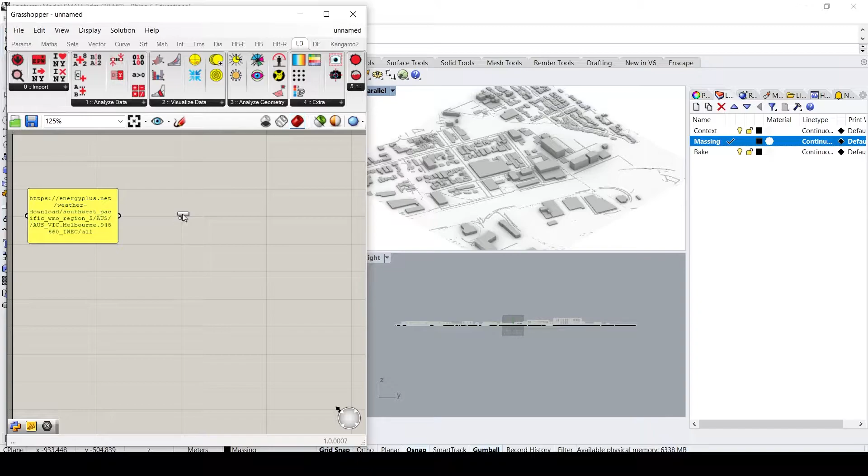So then we'll go up to the LB Download Weather and we'll click that and bring it onto the canvas. We link the weather URL to there, and then we're going to go to the LB Import Location.

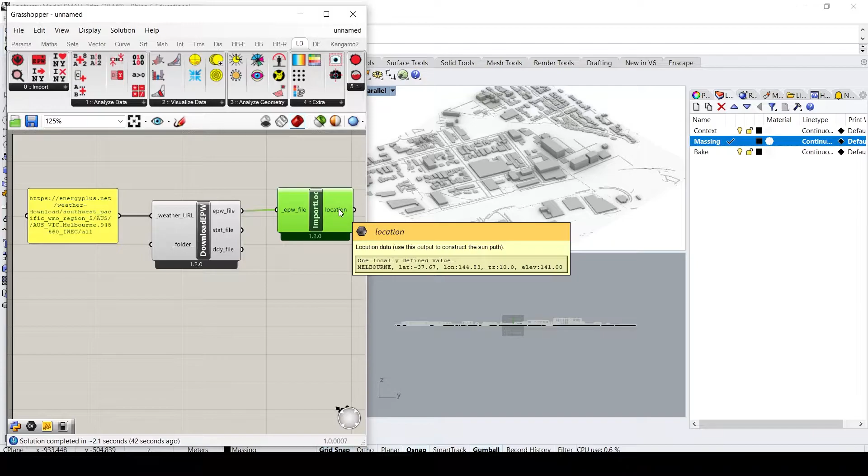We'll drag that onto the canvas and link the EPW file to that. Now if we hover over location, we'll be able to see that it's Melbourne, and it'll give us the latitude and longitude values.

From there, we're going to go to LB Sun Path, click that, and drop it onto the canvas here. We'll bring it over and link the location to that.

But we're going to need a few more things for this. We're going to have to give it a date and time. Basically we've got to create a time period for this sun path to run the analysis for the duration of this radiation analysis.

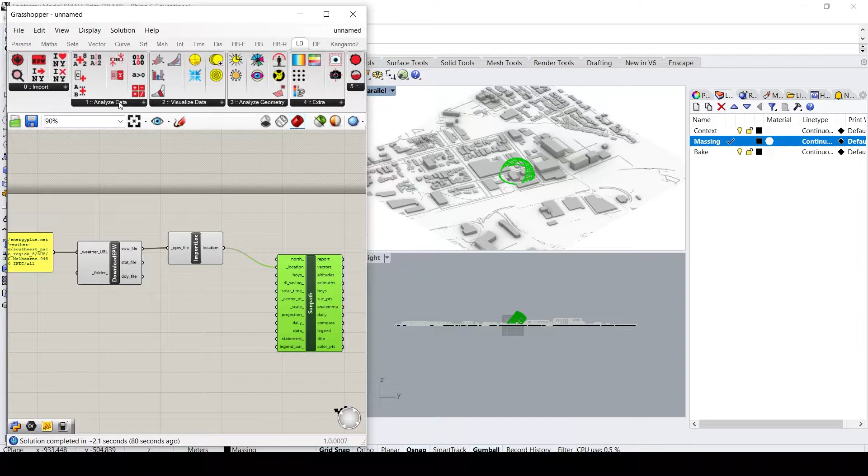So we'll go to the Analyze Data tab and go to LB Analysis Period. We'll click that and drop it on the canvas. This will give us a period of time, so we're able to give it a start month and day as well as an end month and day.

So I'm going to start it on the 12th month, and I'll do that by entering a panel, and I'll put 12 in there.

Then we're going to add a day for the start day and an end month and end day. So we'll do the 1st of the 12th. We'll do the first month and we'll end it on the 1st of the first month. So now we just put 12th month, the 1st of the 12th, end month, the 1st of the 1st.

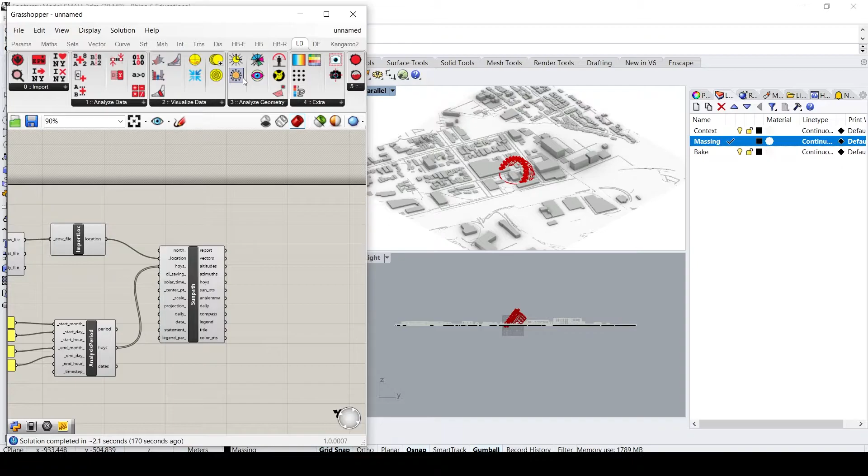Now that that's all done, we can add the HOYs value to the HOYs value on the sun path. We have to drop another Ladybug tool onto the canvas, and we're going with LB Direct Sunlight Hours.

We'll click that and drop it on, and what we're going to need to do is connect the vectors to the vectors. We still need a few things on this direct sun hours tool in order for it to run the analysis.

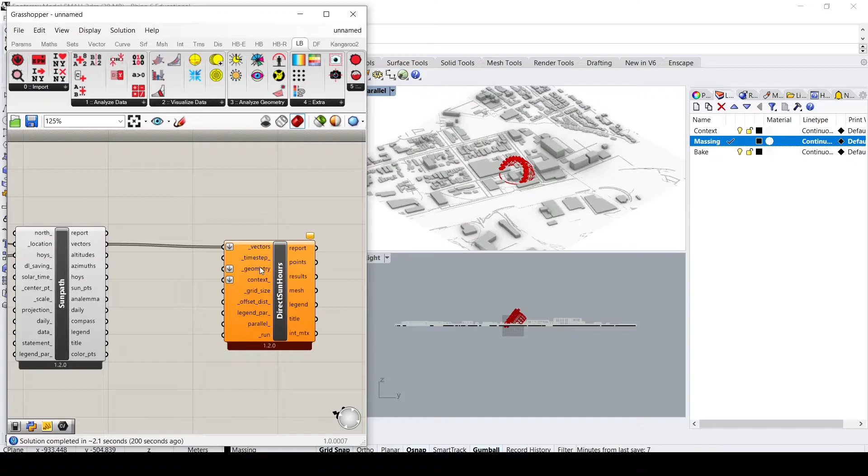We've got to add, if we go up to the box here, geometry, grid size, and give it a toggle to run the test. So we'll go to add a toggle and we'll put that down on the canvas, a boolean toggle. We'll put that on the run, then we'll add geometry.

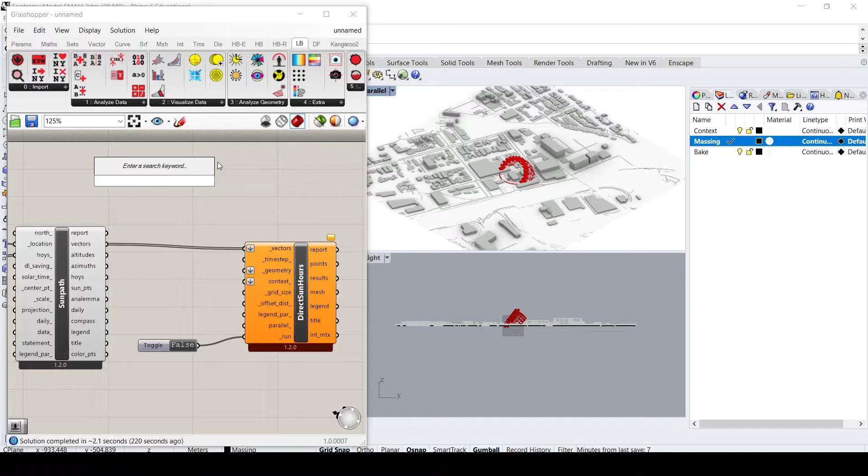I find the best way to add geometry is to put it through a geometry pipeline so that it references it straight from the Rhino model. So we'll put that there, we'll add geometry.

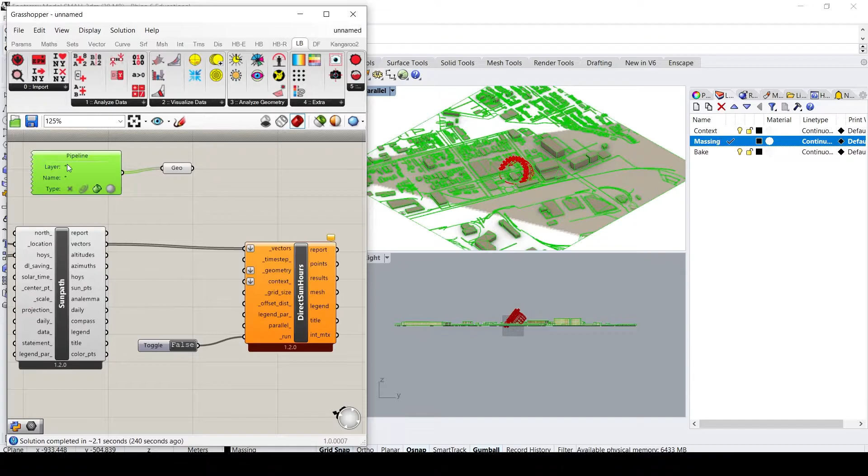Now we'll add that in. We've got to make sure that it's on the geometry pipeline. We double click this tube-like image here, and we're going to add a layer, calling it massing, as that's what we already have on the Rhino model. We'll connect that to geometry.

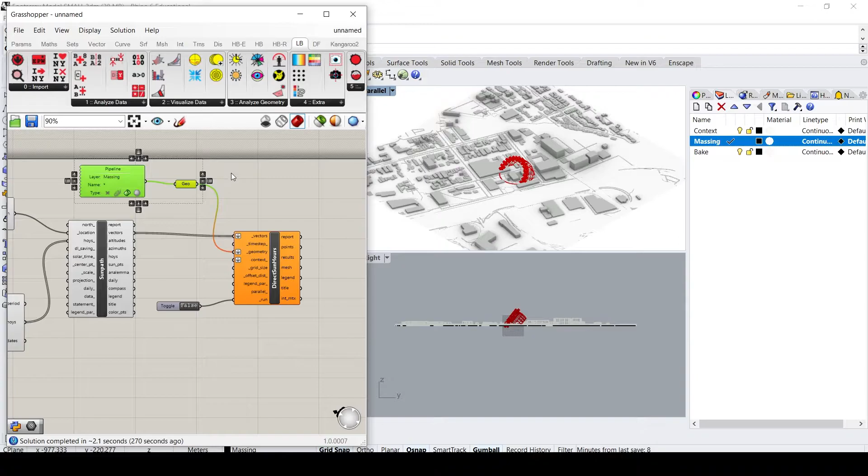Then we'll copy and paste this, and reference the context of the analysis. So Control C, Control V that, and we'll change the layer to context.

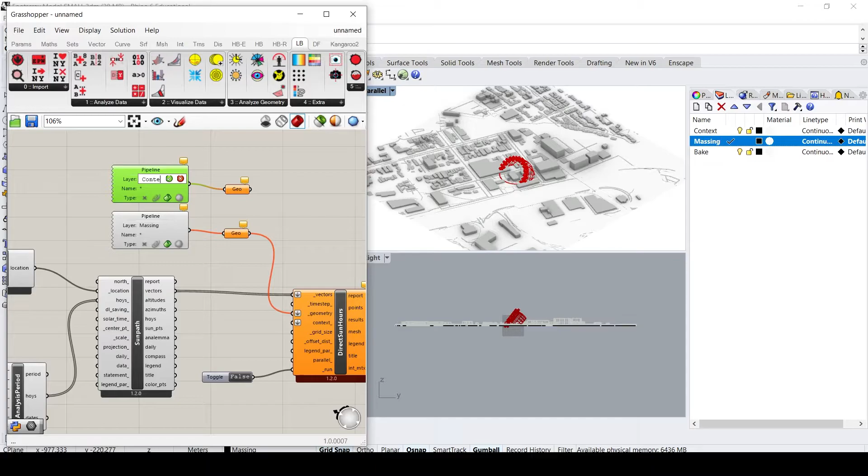The context we're using for this test will be the Footscray cityscape that we brought across in the last tutorial, working from 3ds Max to Rhino. Once we've connected those, we have a context for this analysis to run off.

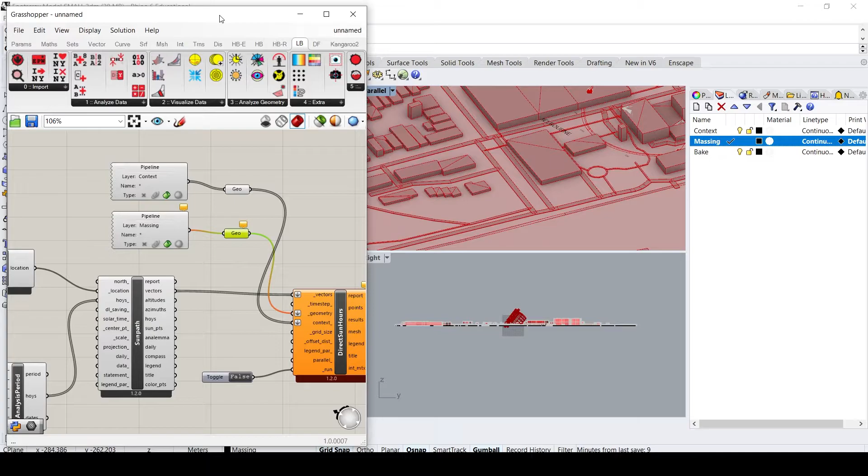We just need to add some geometry for the radiation analysis to perform on. So we'll find an empty lot within the space, and we'll add a mass there. We'll go down here.

Now that we've got a mass in there for the test to run on, we'll just zoom up on that so we get a better look of it once we start the test.

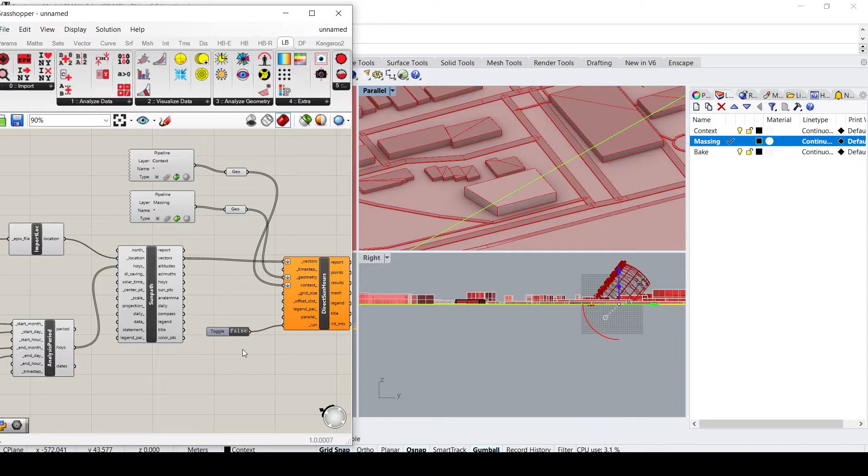As you can see here, we've got the sun path that was created with this tool here. Once we start the test, it should run a solar analysis on this mass that we've added to the massing model. So we'll just flick it over to true.

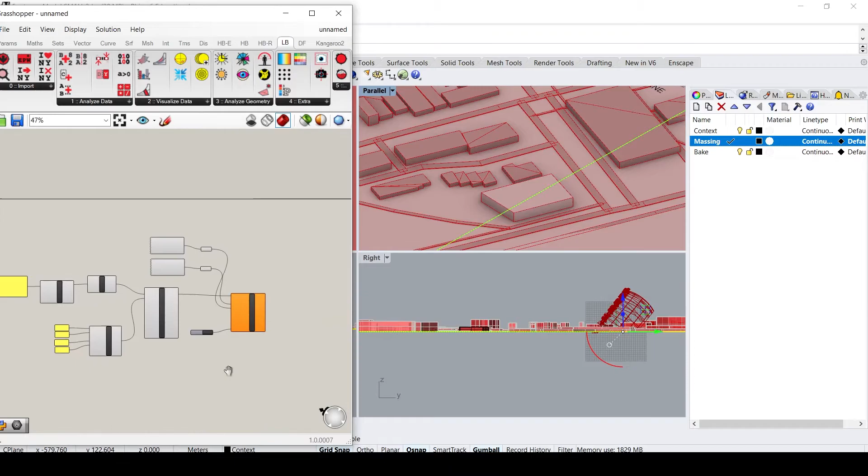At the moment we can't see anything, but we'll just see why that's happening. Grid size - we haven't added a grid size yet.

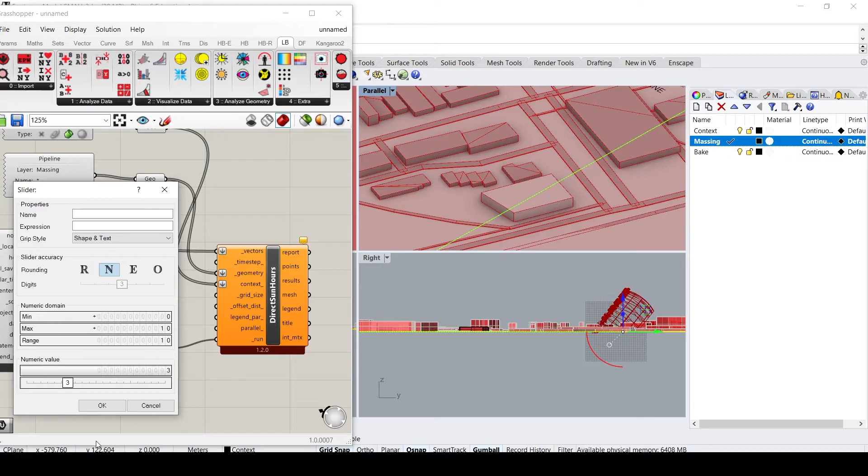So we're going to have to add a number slider here, and we're going to change this to an integer, so a full number, giving it a range to 10. The grid size is going to be 3 meters by 3 meters on the building.

Then we also have to add an offset distance for the test to run off the building. So we'll add another number slider. We add the offset distance so that it's more clear in the analysis, so we can see the surface of the radiation results, because at the moment it's a bit blocked by the surfaces of the actual mass.

So we'll add a number slider again, and we'll just change that to 0.1. That'll be running 10 centimeters off the building.

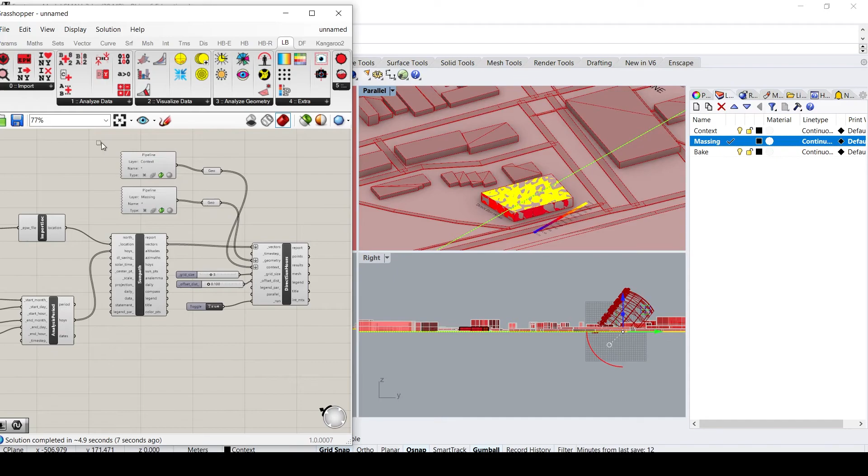Now that we have that in, we should be able to see the test results a bit better. So we can turn preview off on these two massing objects, so then they're not red anymore.

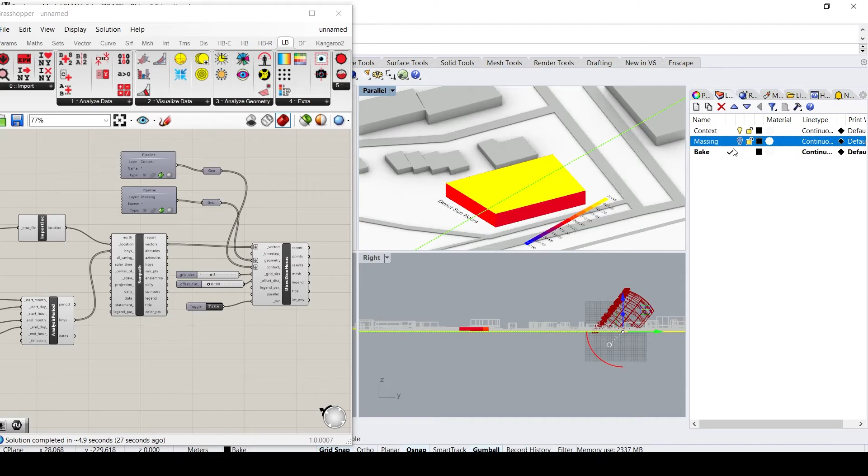And we get a better result, so we just hide the massing for now. We're able to see the results of this radiation analysis.

As we can see in this mass, this does not get any shade from surrounding buildings, but if we were to move the mass to, say, within the bigger building framework, we'll have a look what happens then.

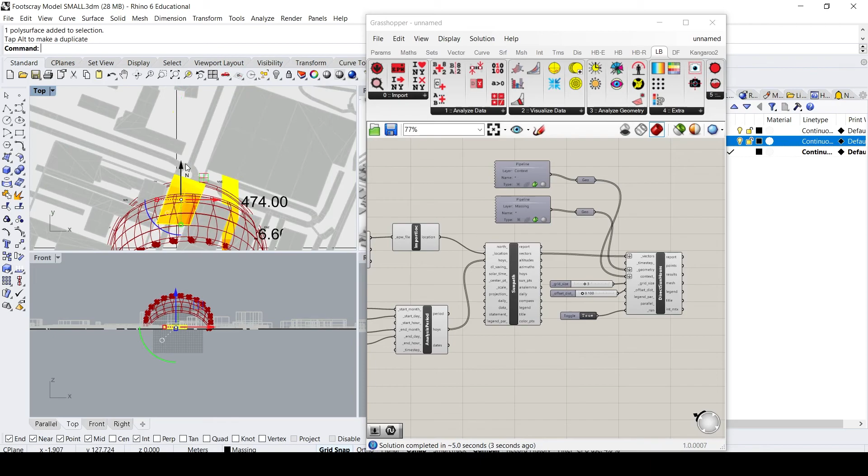If we turn the massing off, we'll get a better look at this. As we can see, the blue area there is showing that it's receiving much less sun than the red areas and yellow areas on the other sides of the building.

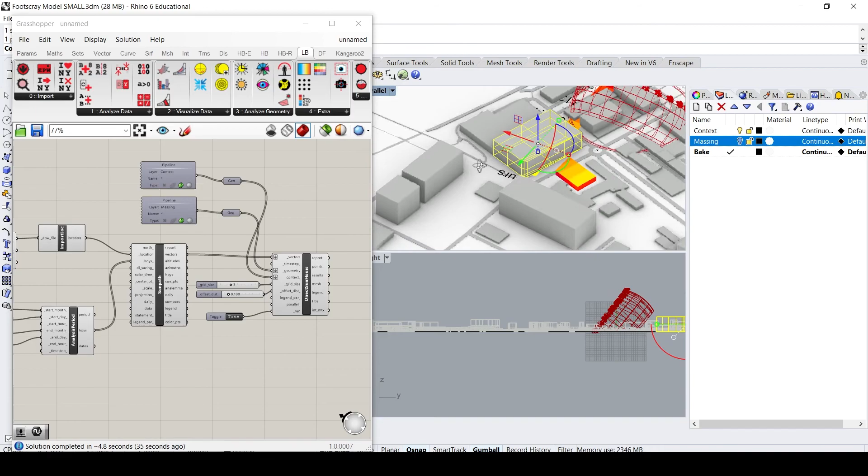So when we look at the key here, we're able to see the direct sun hours over the space of a month, as we've set in the test for the radiation analysis.

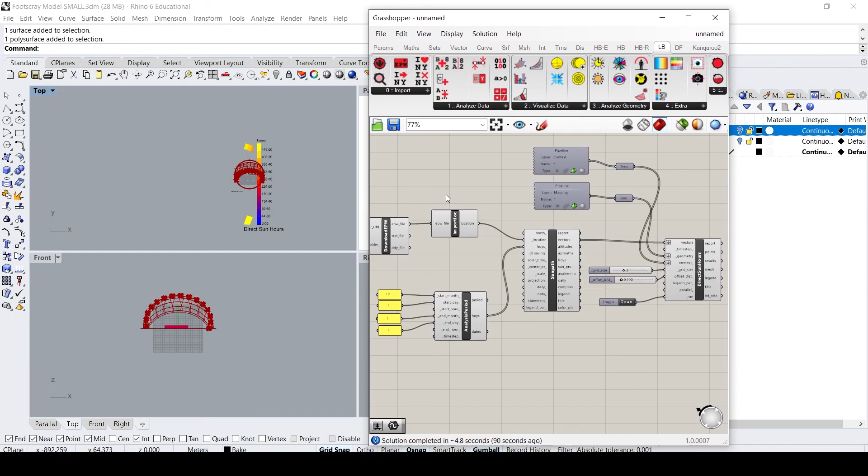So this was just a quick tutorial on how to run Ladybug radiation analysis, and I hope that it's been helpful. Thanks for listening.